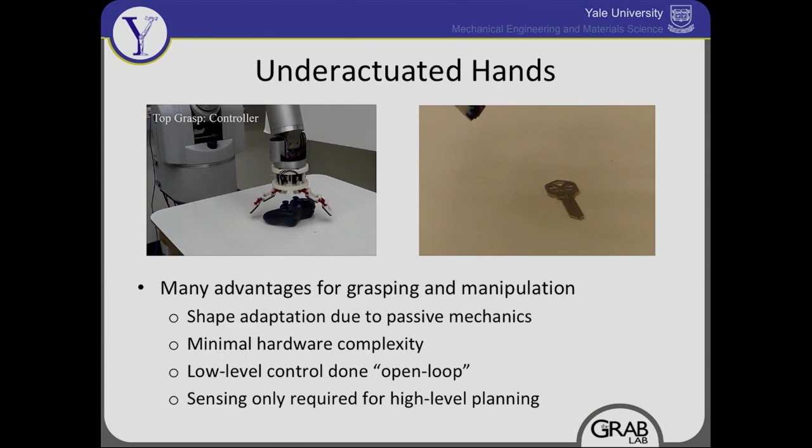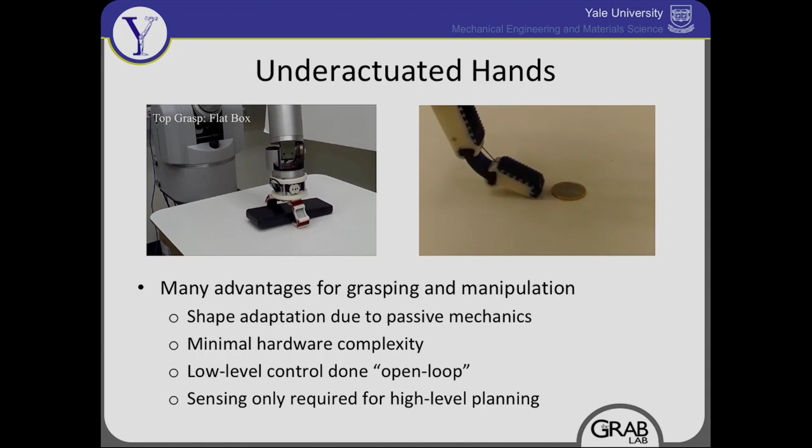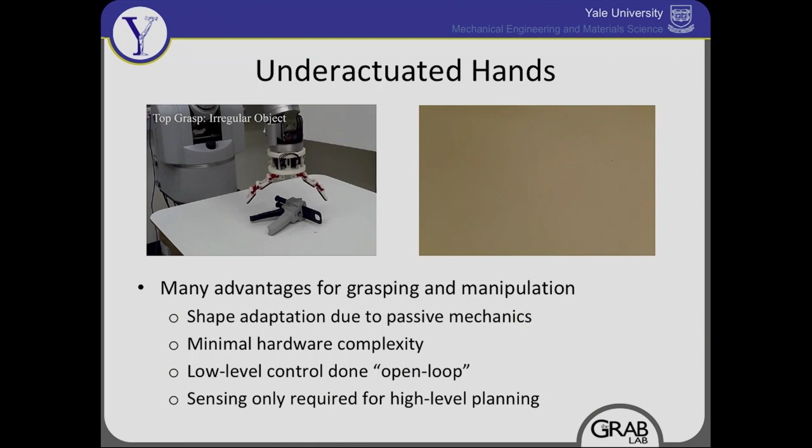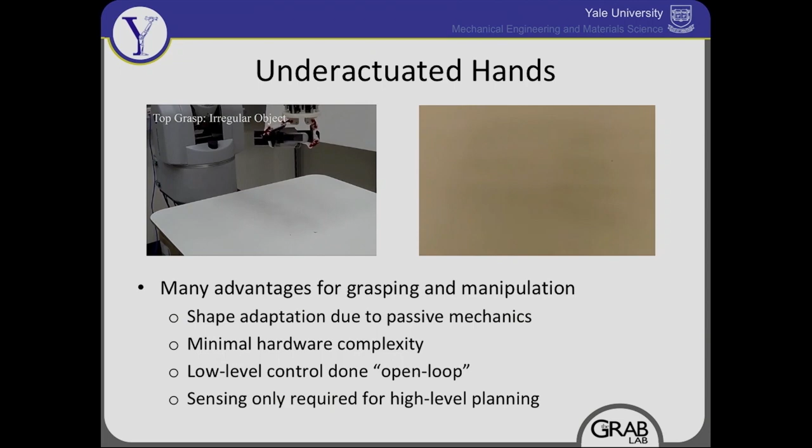So in our lab, we mainly focus on making manipulation and grasping tasks easier by relying on passive adaptation of our gripper design. We achieve this by simply designing some underactuated grippers that can adapt to the shape of the objects, even very complicated shapes. And they also allow intentional or unintentional contact with the environment. Long story short, what we do here is trying to make the manipulation task easier, but also make it possible for very simple systems with minimal control effort, minimal sensor requirements, and minimal planning.

And for this purpose, we have designed various underactuated hands, some of which you can see here. These are open source hands. They are very inexpensive, by the way, compared to their fully actuated counterparts, and they are very easy to fabricate. So you can actually go to our website and download these models and fabricate it yourself. And also, these hands provide us the compliance and adaptability that we are seeking for a successful manipulation operation.

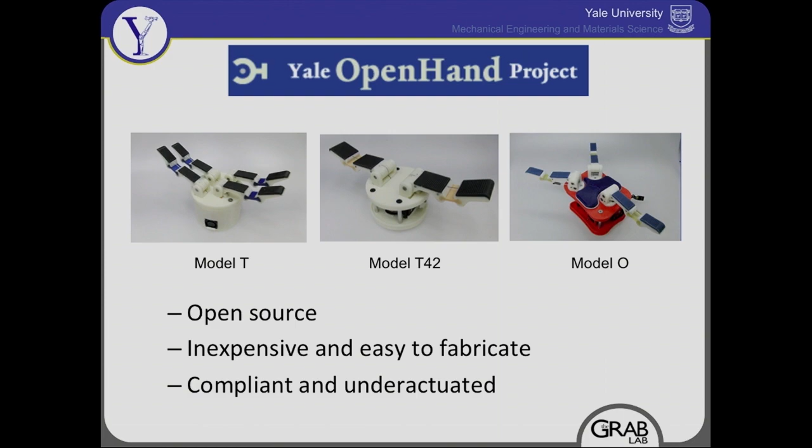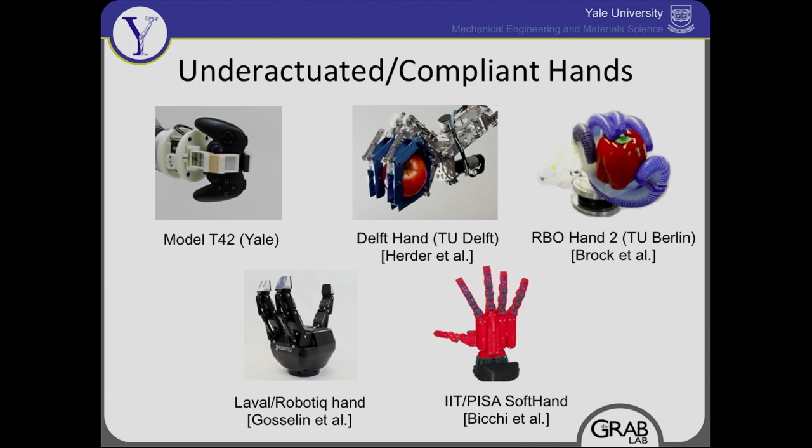And in literature, we see other underactuated hands too. And actually, these hands have been tested for their grasping performance quite thoroughly, I must say. And the manipulation community at large agrees that compliant hands are very, very effective when it comes to grasping. But how about after grasping? So this is what we are considering.

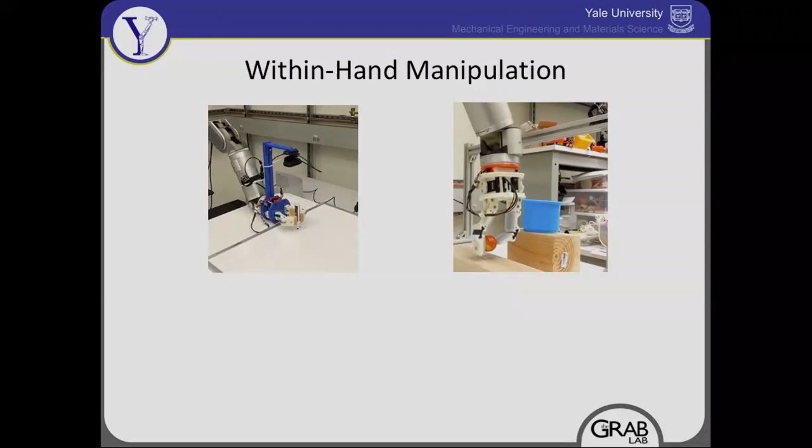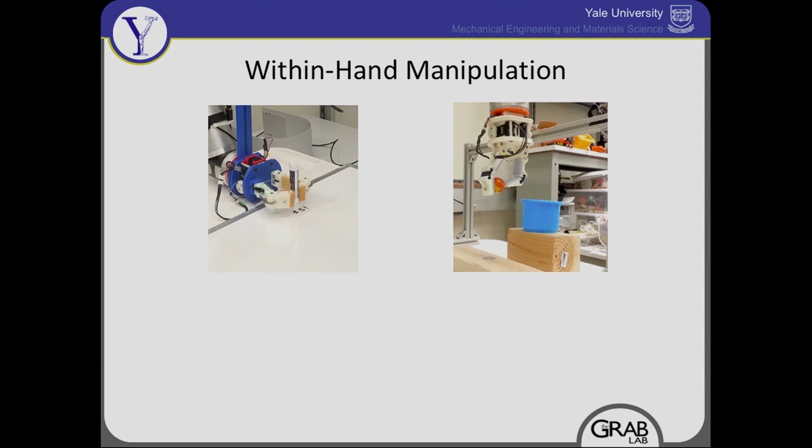When we want to manipulate an object after we grasp it within hand, there are some challenges, but there are also a lot of perks coming with it. For example, as humans, we are heavily relying on within-hand manipulation skills. Almost all the manipulation actions that we have also include a within-hand manipulation action. So if we include such abilities in a robotic system, we can enable more human-like manipulation actions.

And also, this means that we allow fine positioning of the object in the hand's workspace with lower inertia fingers rather than whole arm motions. This means that we have lower energy requirements, but together with that, we have a potential of more precisely moving an object within the workspace. Also, thanks to the added degrees of freedom coming from the gripper, we extend the workspace of the gripper, which allows us to avoid some obstacles and other types of manipulation constraints.

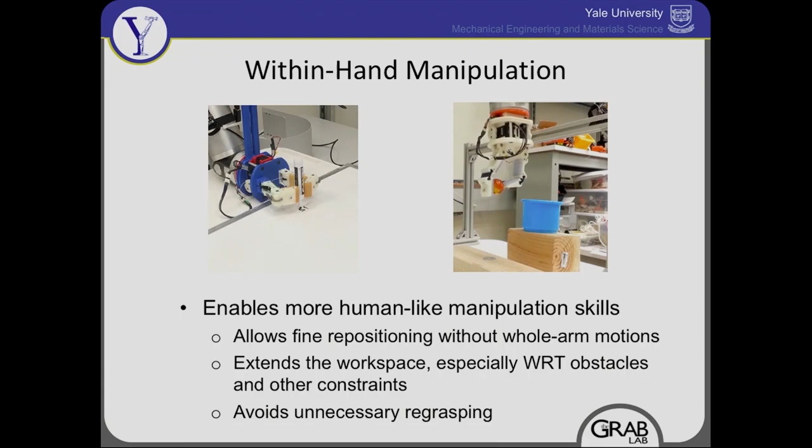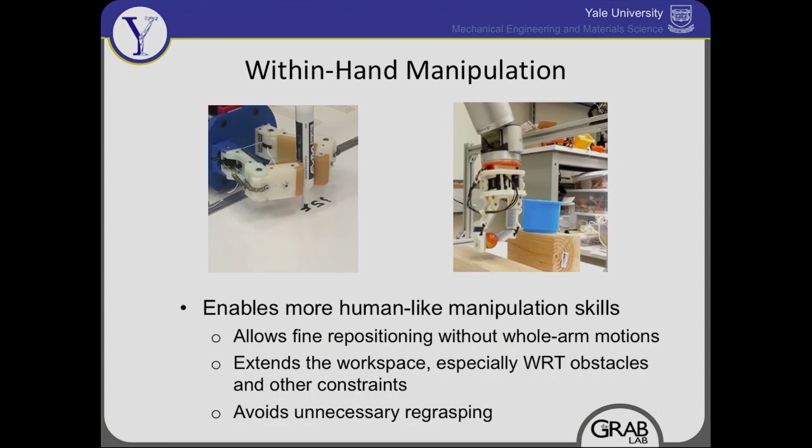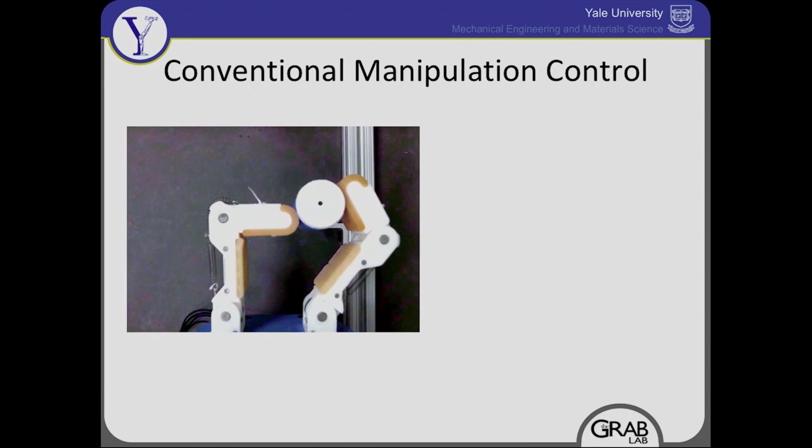And also, since we can change the pose of the object within hand, we avoid unnecessary regrasping actions, which makes the manipulation operation much more efficient. So in order to have all these advantages, we need to conduct manipulation control. But conventional ways of doing this actually require accurate hand-object models. For example, we need a very accurate model of the object.

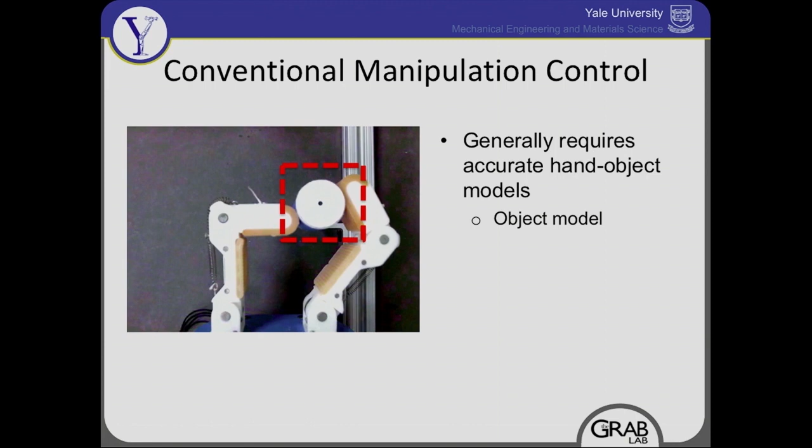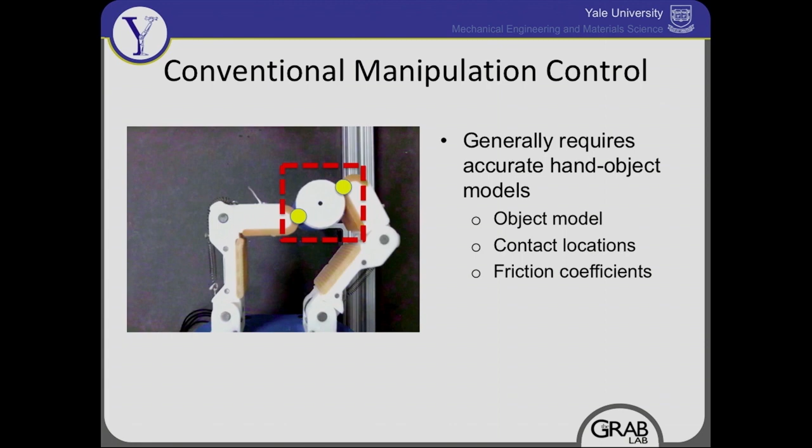We require contact locations to be known both on the object and on the finger. And we need to know friction coefficients between the object and the gripper. And we also need to have a very accurate hand model. But apart from these, we also need to track the state of the hand-object system all the time, which brings additional sensory requirements such as joint sensing and force sensing.

When we look at this picture, we see that many of these parameters are not available to us very easily. For example, if we are operating in unstructured environments, we don't have object models available to us. Contact locations are very hard to estimate. Friction coefficients are definitely very hard to obtain. And depending on the hand, we may have some sensor modalities, and we may not have them in some other gripper designs.

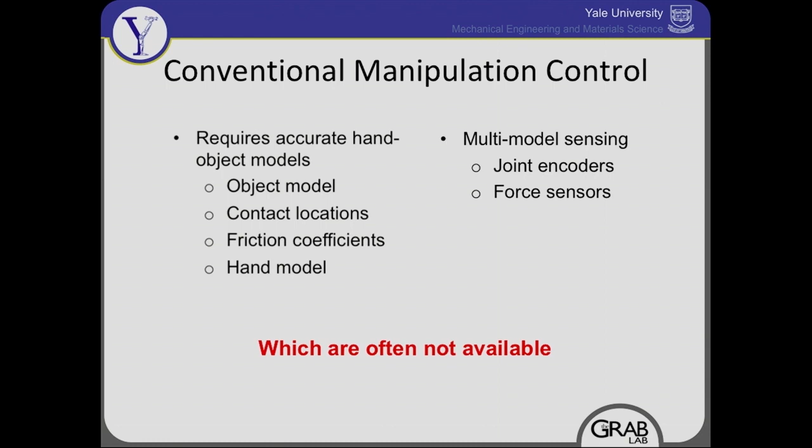However, underactuation again saves the day here. Underactuation provides a stable closed chain with the object, and we get it almost for free. We don't use joint sensing or force sensing here, but we still have stable contact. In order to have such a closed chain with fully actuated grippers, we need to define and meet some additional constraints, which is much more difficult work.

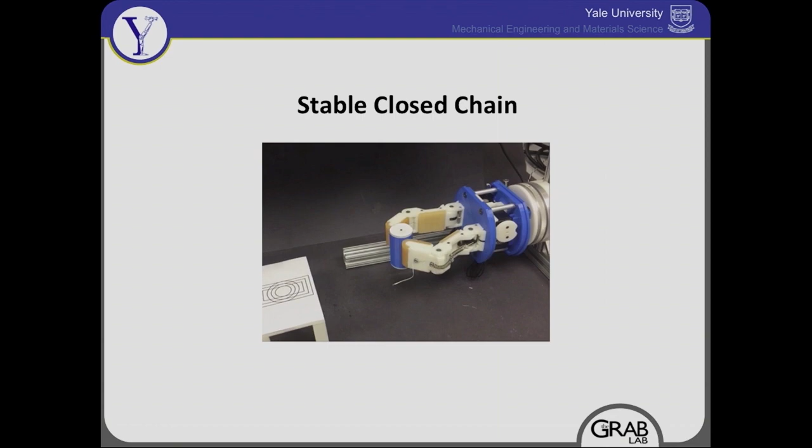But in underactuated hands, we get it very easily with minimal planning. Achieving such a closed chain and maintaining it during a within-hand manipulation operation is the key. Once we have that, as shown in our previous work, we can very precisely move the object within the gripper's workspace using very simple vision feedback. We are also using very simple hand-object models, not accurate at all—almost like a binary Jacobian. Again, we are not relying on force sensors or joint encoders.

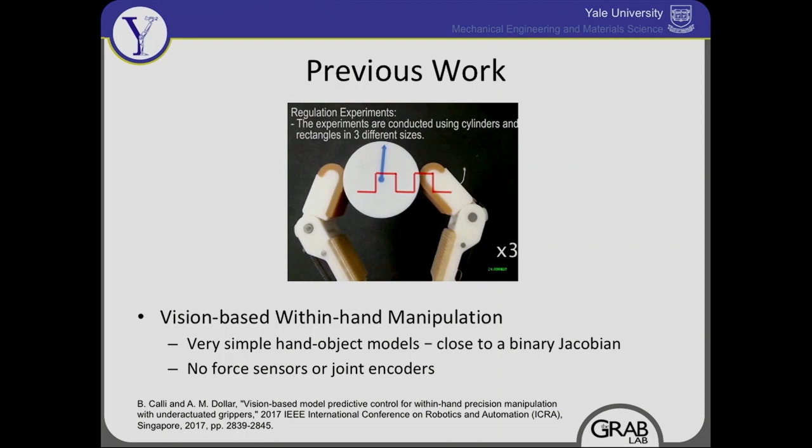However, when we manipulate an object during this operation, we see that a lot of manipulation phenomena happen. For example, the object can roll on the surface of the fingers. At times it can go out of the workspace of the hand-object system and drop. It might slide on the finger surfaces, or it might get stuck at the hand-object system singularities. By the way, we call the rolling operation the normal operation too, because it happens more frequently.

But in a manipulation operation, transitions between these modes are happening all the time, and it's very important to recognize when these transitions are happening, because we want to either trigger or prevent these modes depending on our application. For example, if we want to precisely position our object within the hand, we want to avoid dropping it, but if we want to release an object, we want to trigger the drop mode.

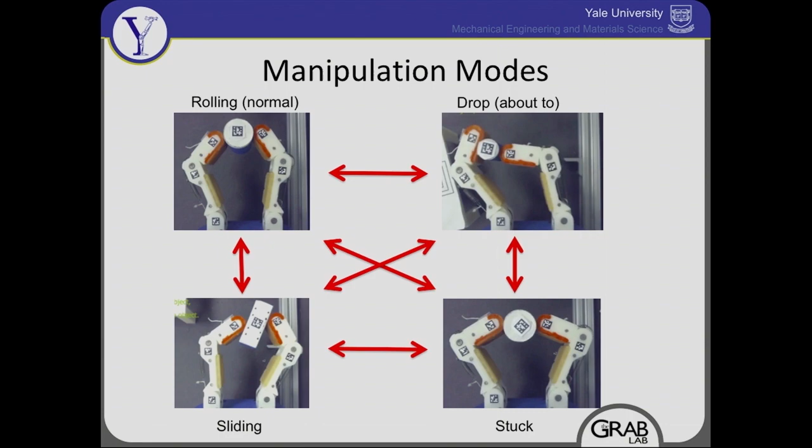Similarly, for sliding, sometimes we want to trigger it because we want to position the object in a particular way within the hand, but sometimes we want to avoid it because we simply want a tighter grip on the object. So recognizing the transitions between these modes is quite crucial for reliable in-hand manipulation. We achieve this in this paper in a totally model-free, data-driven way, without relying on object models or hand models.

Here you can see that we follow the same philosophy we had for grasping with underactuated hands and vision-based control with underactuated hands: we are not relying on sophisticated sensing, and we are not relying on accurate knowledge of hand-object models.

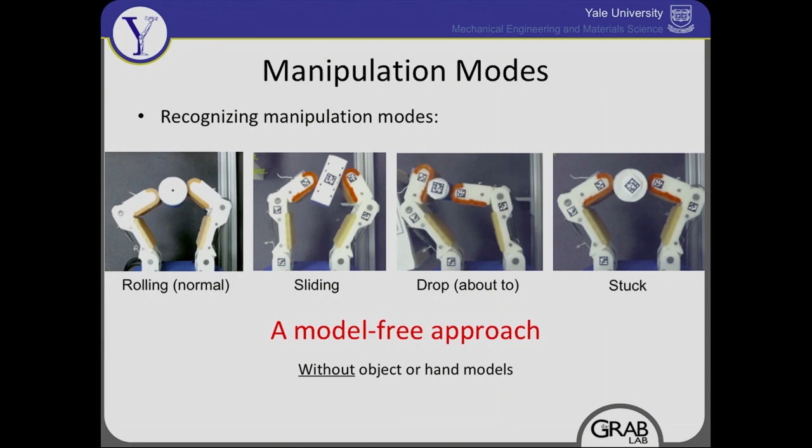When we look at the related work, we see papers that detect sliding mode, and also some papers that detect grasp stability and can determine whether the object is within the vicinity of dropping or not. But these works heavily rely on force sensing at the finger contact locations, and they only recognize particular modes. In our case, we recognize all four modes at once, along with the transitions between them.

Our methodology is the following: we use supervised learning techniques and utilize visual features and actuator features. You can see the full list of our features here. Our actuator features are actuator positions, actuator velocities, and actuator loads.

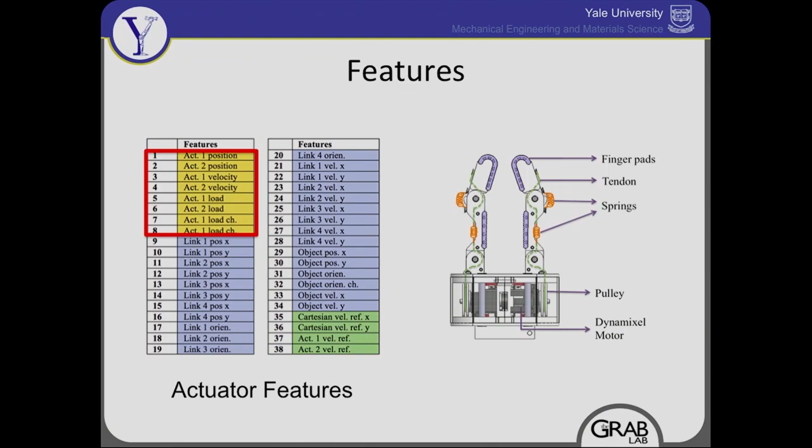It is very important to notice that these are not coming from the joint locations, but actually from the base of the gripper, because the actuators are located there, pulling the tendons to operate this underactuated system. We also use visual features obtained from markers located on the fingers and on the object, using link positions, velocities, and orientations together with object positions and velocities.

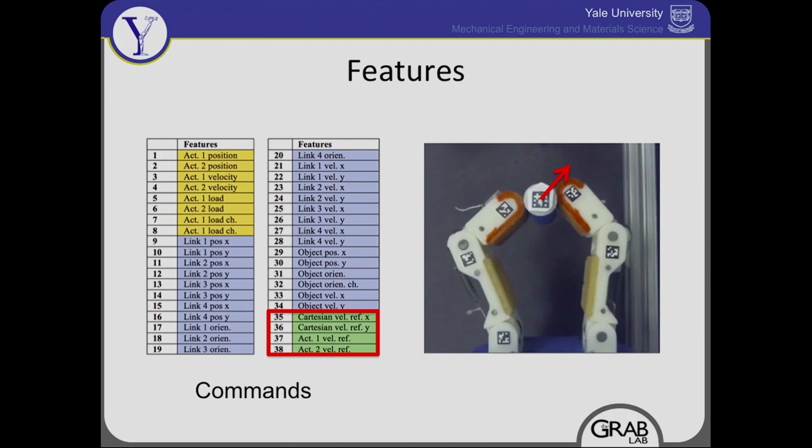We also checked the performance with a subset of these features for different scenarios. For example, if you don't have access to visual data and only use actuator features, we still have 93% success rate. Moreover, if we use only visual features but not actuator features, we still have 93% success rate again. So these are, again, very high recognition rates.

We also tested the extrapolation ability of our classifier, training it with small and medium objects and testing its performance on large objects. We see that we achieve more than 92% success rate in this case, even with the sub-features I was just talking about. This gives us a good indication of how robust our scheme is.